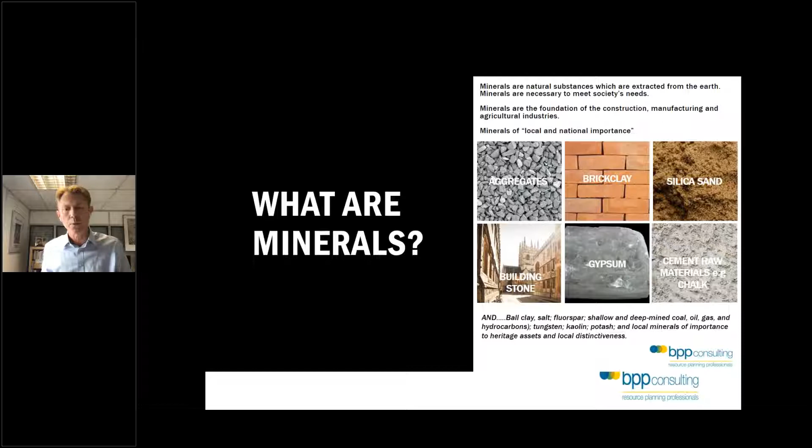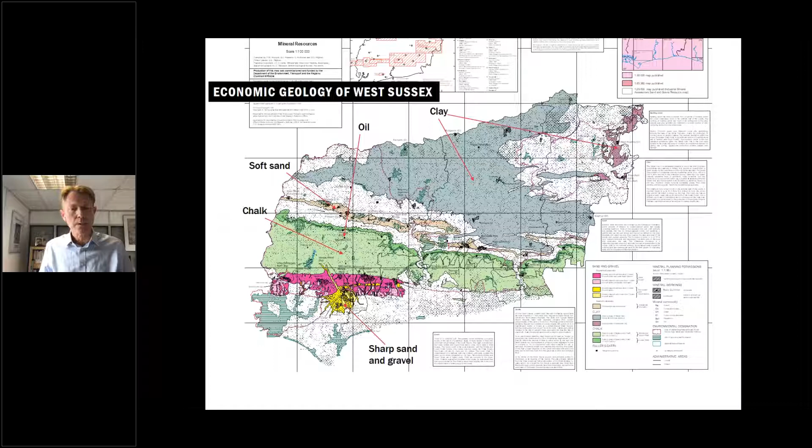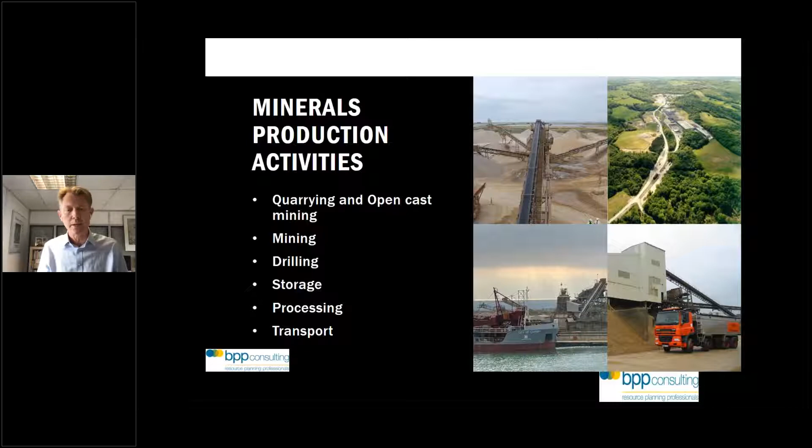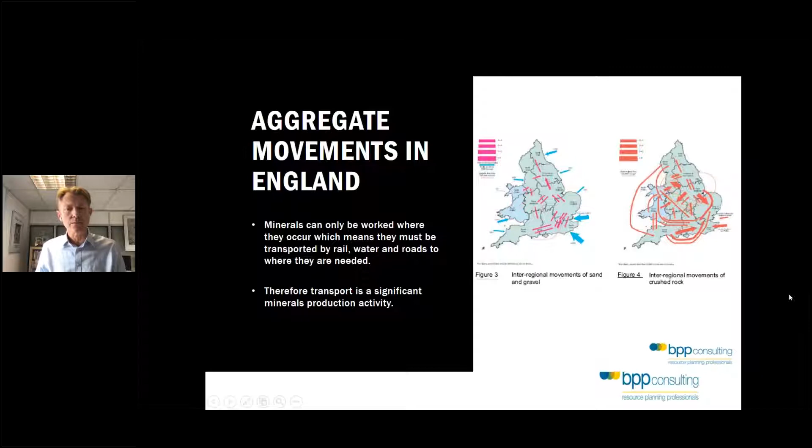Most of the minerals are not evenly distributed, and so have to be transported around the country to where they can be used. Next slide. And this slide briefly shows movements of minerals. I know David will talk a little bit more about this, but basically it's trying to illustrate the point that minerals transport is a particularly important activity. And utilisation of water and rail is an important aspect. It's a bulk material which does lend itself to rail and water transport. Next slide.

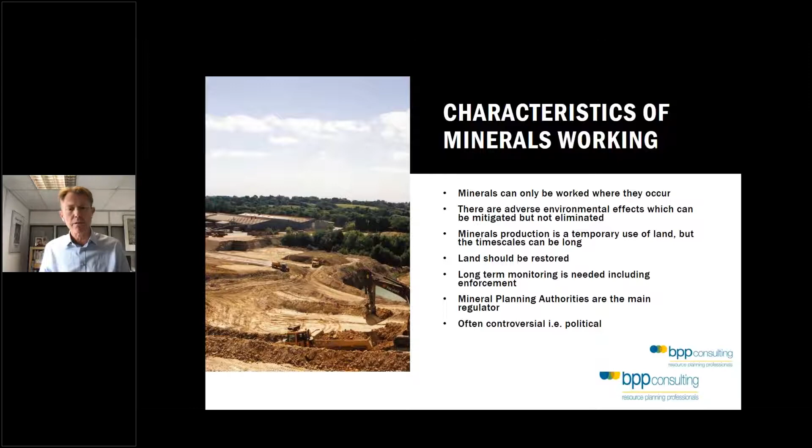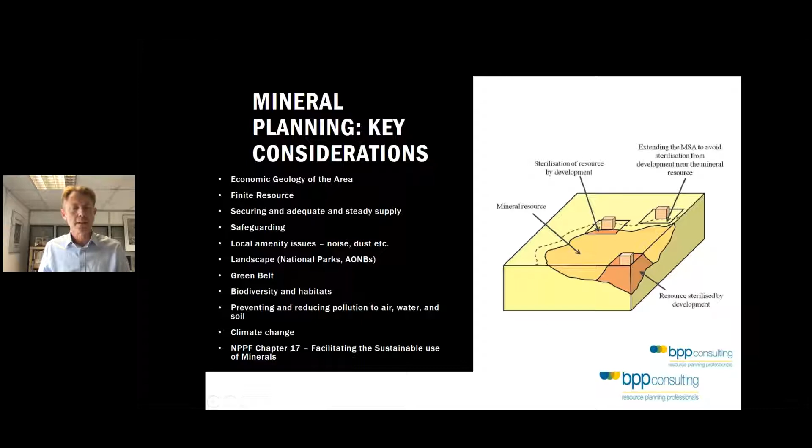Inevitably, there's local amenity issues to consider, such as noise and dust. Landscape is a key issue. It does seem that many of our most important minerals are located near to national parks, areas of outstanding natural beauty. Jeffrey's moving me on quickly, quite right too.

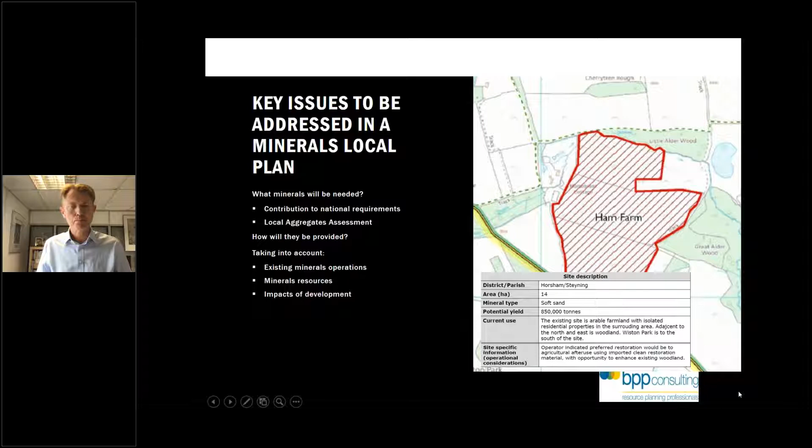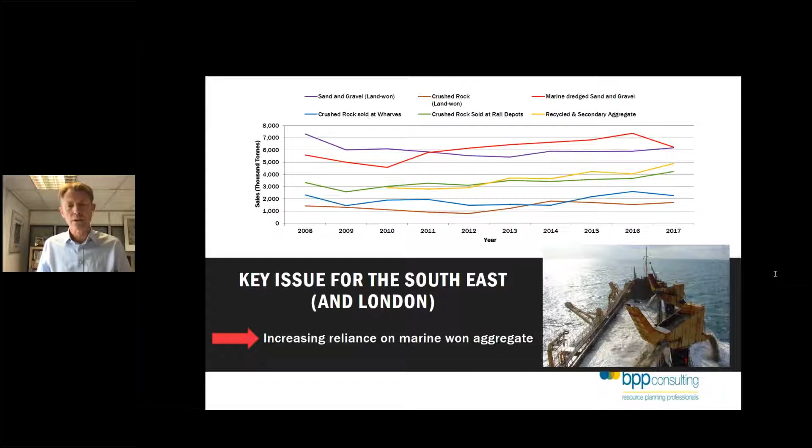Next slide. So that's it. Just a warm up really for David and Helen. Thank you.

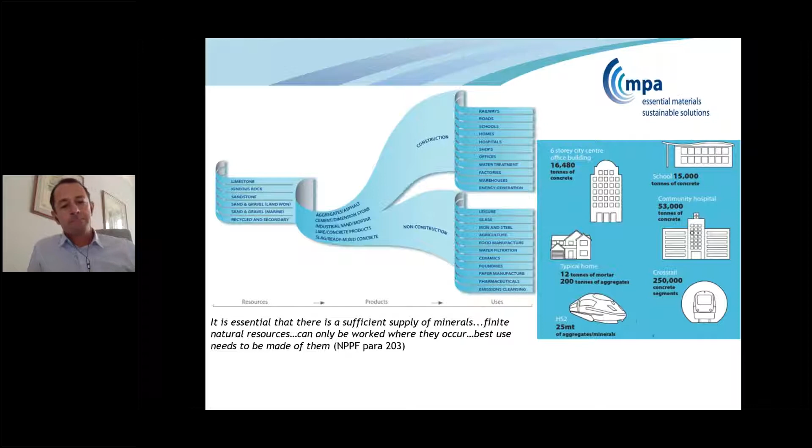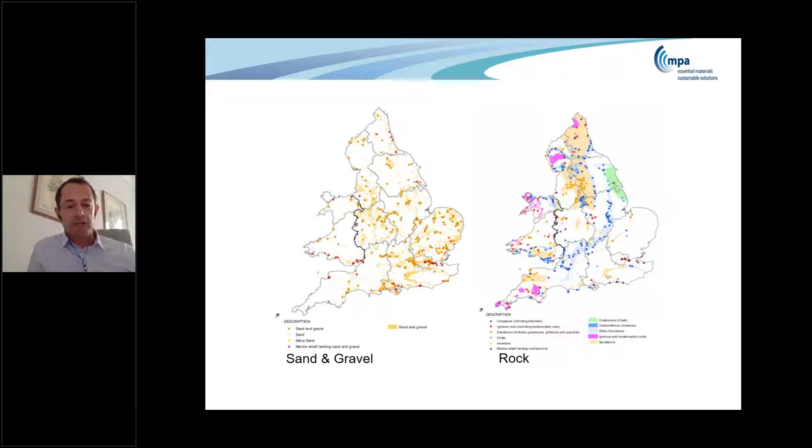So particularly from the South East and London perspective, a lot of rock is imported from the South West and also from the East Midlands, particularly Leicestershire, into the South East and London, which has very few rock resources, as you can see.

Next slide, please. So some examples of what it looks like. If you go back a sec, Jeffrey, just tab backwards. This is a soft sand site down in Hampshire, so it's used primarily for mortar, so for bricklaying. You can see that the characteristic is quite shallow. This is a very good natural resource which requires very little processing from the ground.

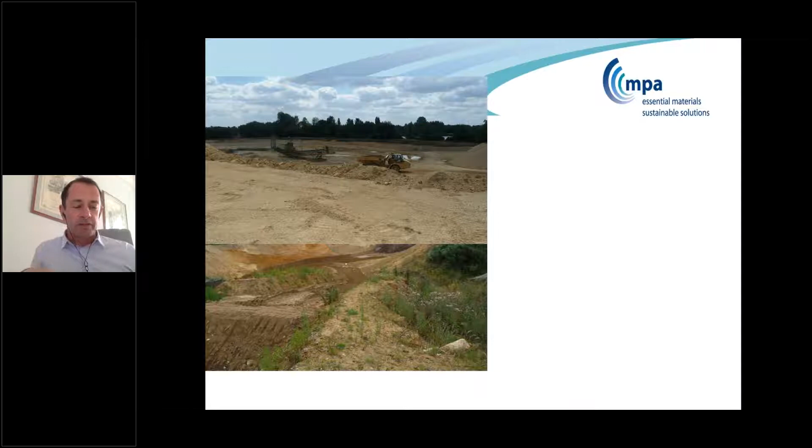Next slide, please. This is a typical sand and gravel quarry. This one's in Oxfordshire. Again, reasonably shallow. It's in a river valley. Very small amount of overburden, so the resource is just below the surface. This site in particular is going to be restored to a very large nature reserve, one of the largest reed beds in the country when it's restored in about 20 years' time.

This site is a rock site up in Shropshire. The stone here is very important for road stones. It's very skid resistant. There was the Bahrain Grand Prix yesterday, which had that crash, obviously. The rock that surfaces the Bahrain Grand Prix circuit is from this site in Shropshire, incredibly. Next slide, please, just to show that it's not only locally important, some of this material is globally important.

This is a limestone quarry with a cement works, so feeding the cement works. And next slide, please. And this is China clay works down in Cornwall, so quite extensive working to extract the China clay. I think what we can actually see in the foreground there is aggregate processing, which is a kind of secondary activity on top of the China clay. China clay, again, a globally important resource, goes into a lot of ceramics, a lot of paper around the world. Any toilet you've ever sat on, the China clay probably came from there.

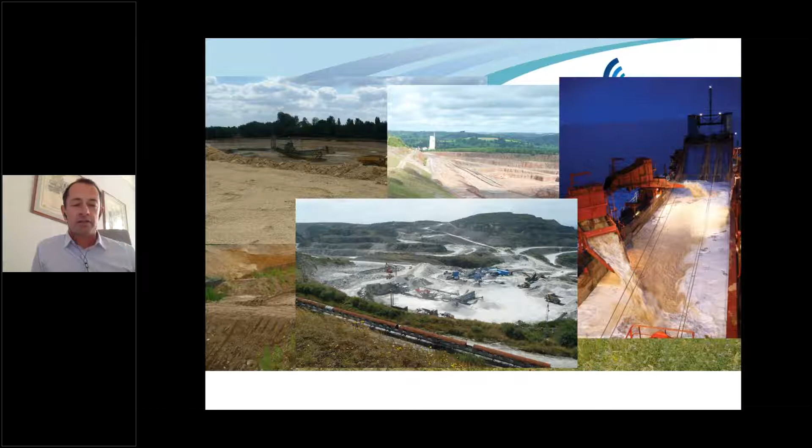And this is marine dredged, coming into a dredger, so it's hoovered off the seabed pretty much. And I'll say a bit more about that in a second. Just so you can visualize the impacts and the scale of some of these operations. Okay, focusing on aggregates and the managed aggregate supply system, I'll explain what this is, because this is the main flow of material. It's the main type of material that planning generally, particularly in the Southeast, has to consider. Next slide, please.

So I think Ian showed this slide. Reflecting the distribution, the managed aggregate supply system is supposed to secure a steady and adequate supply of material and address regional geographic imbalances between where the material exists and where it's required, so between the supply and the demand. This diagram just shows some of the main movements of material.

So on the left, you have crushed rock movements, which, given the limited distribution in the North, Midlands and the Southwest, a lot of it goes into the main markets in London and the Southeast. A lot of that by rail, so the long distance movements are by rail. There's a lot of infrastructure investment on the production sites with railheads. Material is then moved. A lot of it moves by lorry too, but a lot of it moves by rail into the areas of demand.

On the right, you've got sand and gravel movements, which, because it's more widely distributed, tend to be much smaller, around 30-mile movement maximum of material from a quarry, and much more local supply, because it's heavy, dense material, quite low value. It's not economic to transport it a long distance. Although those two blue arrows coming into the Thames and the South Coast show the major contribution of marine dredged to London and the Southeast too, which I'll talk about a bit more in a sec. Next slide, please.

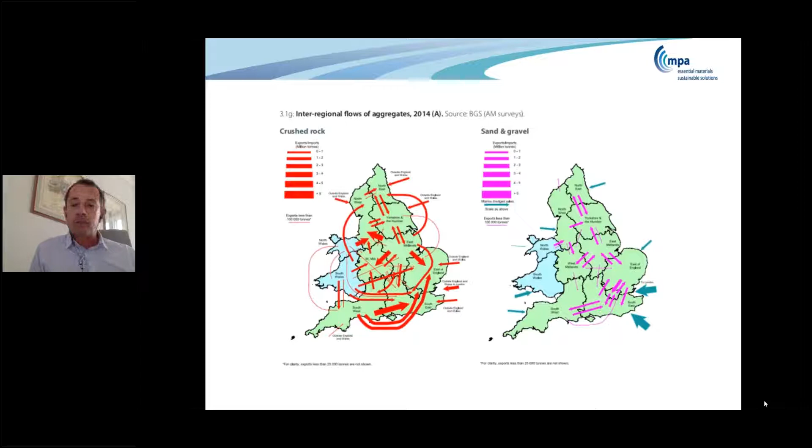So the managed aggregate supply system, prior to 2010 and localism, the abolition of regions, we had a kind of top-down system of national and regional guidelines which set out national forecasts of demand to enable a steady and adequate supply of material, under which you had regional apportionments, which then were distributed to the county councils or the upper-tier authorities to provide in their plans. Under localism, that's gone. The guidelines ran out this year. There's no national forecasting. It's all down to local aggregates assessments. So they are the fundamental component of aggregates planning at the moment.

They're based on the forecast of the average of 10 years sales. So they're quite backwards looking, particularly if you consider the graph I showed you earlier of the impact of the recession. So you look at an average of 10 years sales as the starting point for forward planning for the amount you may need over the next 15 years of a planned period. They're supposed to look at all supply options and also capacity of those sites to supply. And I think the important point here is land banks.

One of the fundamental principles of the managed aggregate supply system is that you maintain minimum land banks, as in permitted reserves of material which are permitted for extraction through the planning system. The minimum are a 7-year land bank for sand and gravel and 10 years for rock, which really reflects the time it takes from identifying sites, going through the planning process and then getting production from them. It can take a long time, so you need a land bank of material to enable steady and adequate supply. And also the balance between demand and supply. Next slide, please.

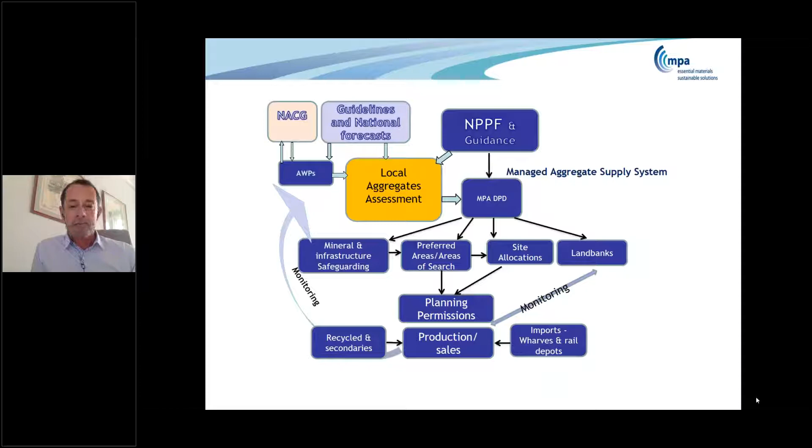Just a diagram here, it's a bit clumsy, but it just shows the central position in the managed aggregate supply system of local aggregates assessments. They inform what the plan provides for. That then goes through to identification of suitable sites, which includes site allocations and also preferred areas or areas of search and planning applications to come forward, maintenance of land banks, ultimately leading to planning permissions and production, then monitored back into the local aggregates assessment. Next slide, please.

So, given the movements of material around the country, the movements are from railheads into rail depots or from marine dredged into aggregates wharves. You need to safeguard the important infrastructure for transport, but you also need to safeguard the material in the ground, which is a long-term aim, long-term policy. It's not just about the amount of material you're going to need for the plan period. It's protecting finite resources for future generations. And the first one is about land-won minerals, identification of where those resources are in the ground, and avoiding unnecessary sterilisation through permitting development on top of them.

So a very important point for district councils, permitting and planning for housing and commercial development, to consider minerals in the ground, mineral safeguarding areas and mineral consultation areas as part of that planning process, which again, historically has been a bit of a problem, that it's not been considered in the local planning process because it's seen as mineral planning, but actually it's the local planning process which is critical to consider where the minerals are.

Next slide, please. Again, the MPA and the POS has produced guidance on the information requirements that are required, the consultation process, particularly between district councils and the county council as the planning authority in two-tier areas, to ensure that minerals safeguarding and safeguarding of infrastructure is taken into account at very early stages of site allocations, distribution of development and planning applications. An important point here, I think, is the concept of the agent of change, which is in the NPPF, which is about ensuring that existing businesses are not adversely affected by new development.

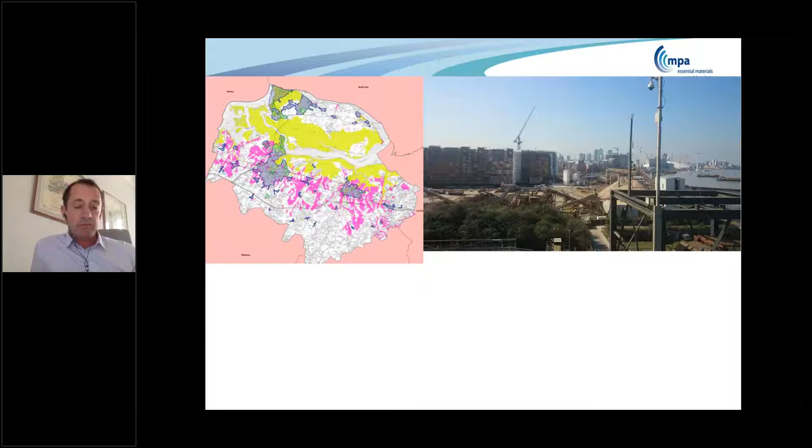And the next one. Thank you. So just to focus on London and the South East, in London, 97% of its primary aggregate supply, in terms of the amount of material that's consumed in London, the primary material that's consumed in London comes from outside London. So a lot of it comes by rail, as I say, from the East Midlands and from the Southwest into rail depots, and a lot comes into those wharves.

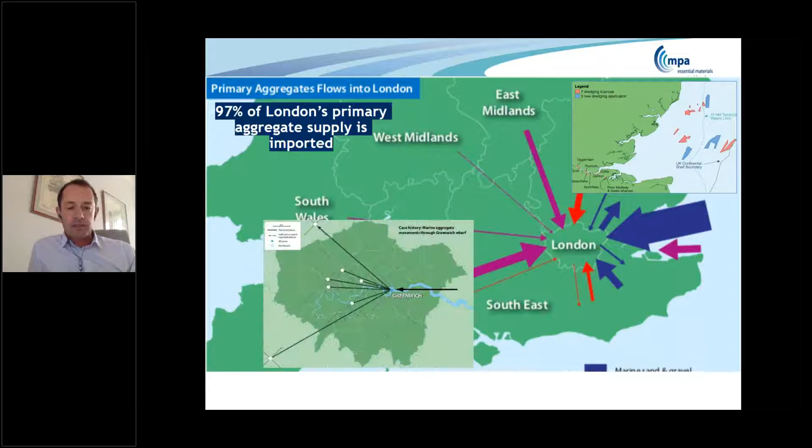Next slide. And these are the licensed areas off the Southeast and off the East of England. These are licensed areas where marine dredging occurs and it comes into those wharves in the Thames. And there's nearly 9 million tonnes a year comes into those wharves. When it comes into Greenwich, it then gets distributed by rail, a lot of it, but also by road.

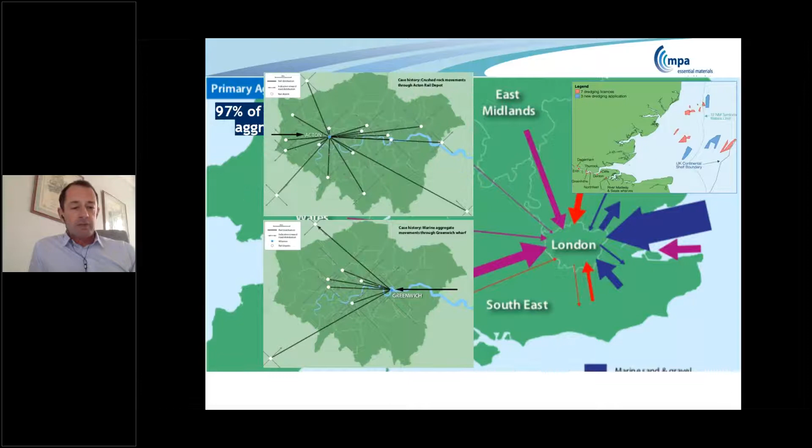Next slide. And into rail depots. So for example, Acton, it then gets distributed around the capital and also outside the capital by rail. So these are just the numbers in terms of which, again, in London, people aren't aware of this, the amount of material that is required to maintain the construction activity and the economy and where it comes from. Most of it comes in through rail depots, wharves, which is why safeguarding is so important. Next slide.

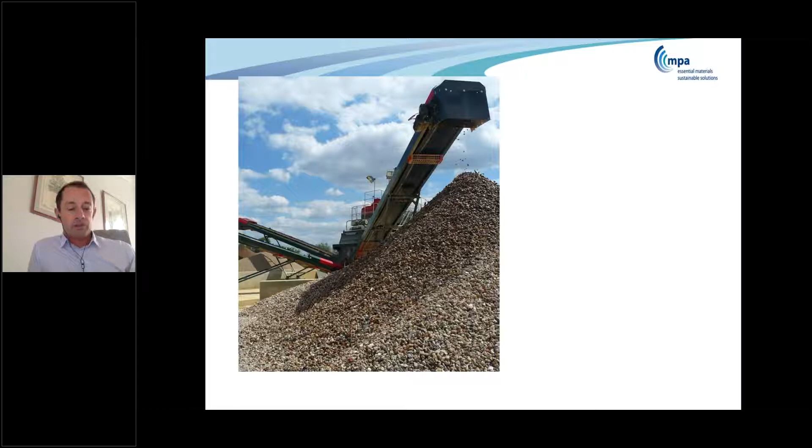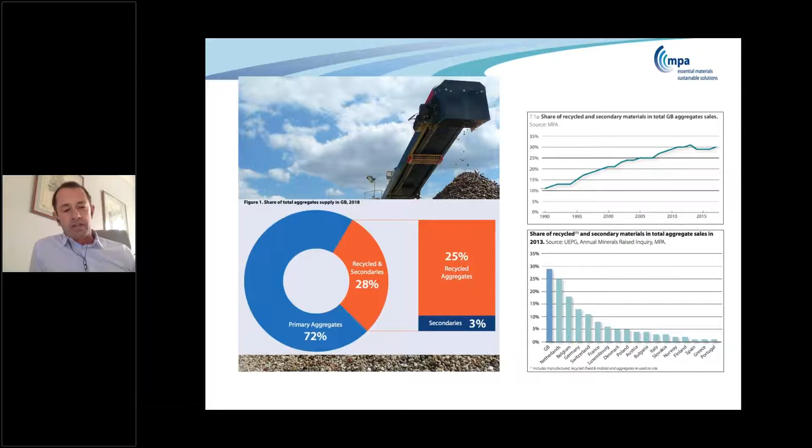And it's 30%. It's about the best in Europe in terms of percentage of overall supply. Of course, that supply depends on the construction material being there in the first place, which depends on construction activity. It also depends on that being the hard fraction of material which is able to be recycled, and also the quality of the processing plant and the kit to extract that material. The MPA has produced a couple of reports recently on this.

On the left, it shows the total waste stream. One of the largest waste streams in the economy is construction, demolition, and excavation waste. 120 million tons, that's the figure that was cited in the recent construction sector deal, which highlighted it was the biggest waste stream. But actually, when you look at where that material goes, the vast majority of it is used constructively, either through recovery, so for landscaping and filling of voids, or into recycling. And in fact, 90% of the hard fraction of construction waste already goes into recycling.

So again, it suggests that it's not an endless supply. We've probably reached the limits in terms of the amount of material, particularly the hard fraction, that can be turned back into recycled aggregate. It's not all suitable for all uses, particularly for structural concrete. You still need primary aggregates. So it's not an answer to replacing primary material. We're going to continue to need primary material.

But NPPF does say before you consider primary material, you've got to look at the practicability of supply from recycled material. So it's an important thing in terms of planning, but don't be under an illusion that you can replace primary production with recycled production. Next slide, please.

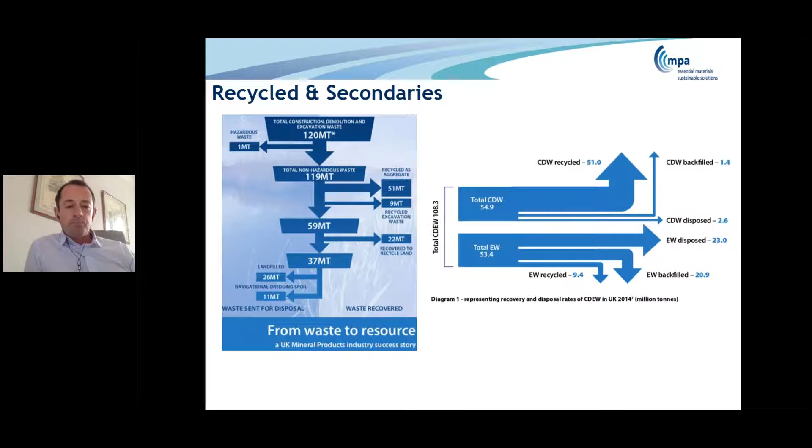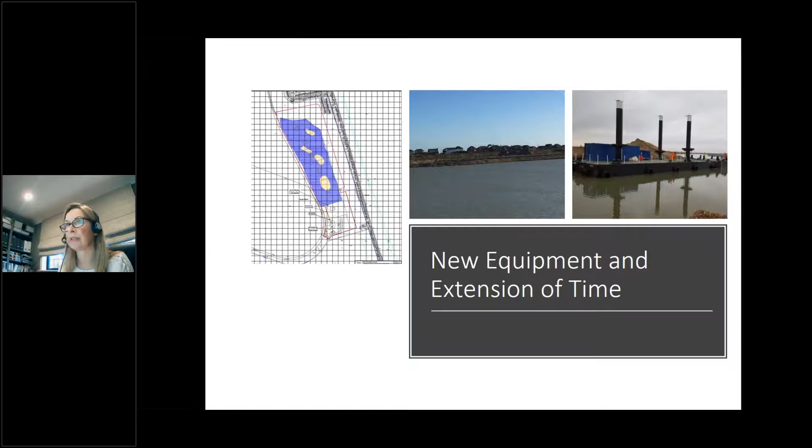And some applications involve the review and update of mineral planning permissions, in particular their conditions, that were granted after the 30th of June 1948. This was made a requirement by the 1995 Environment Act. These applications may need to be supported by EIA as well. Review applications should happen every 15 years, but this frequency has been relaxed now under the Growth and Infrastructure Act of 2013, which enables site operators to request a deferment where there's been no material change in the circumstances of the quarry. Next slide, please.

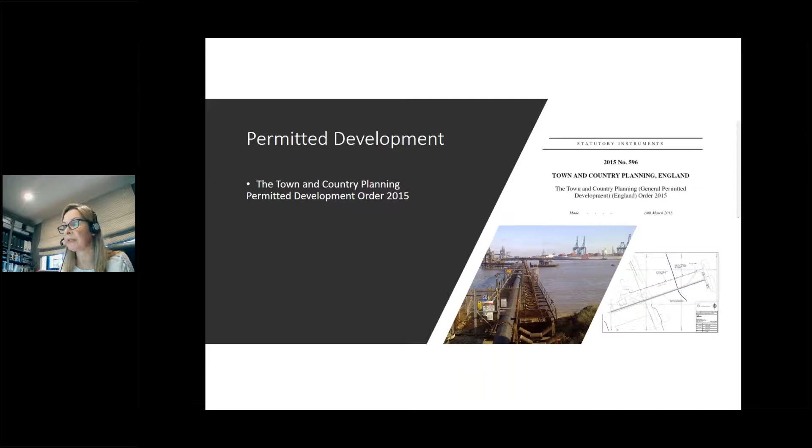Or development may be permitted development, so it's not a planning application for permission as such, but the council still may require you to prepare an application for a certificate of lawfulness of proposed use or development. Next slide, please. Oh, that's fine, sorry.

So now I'm going to quickly focus and run through preparing a planning application for a new mineral site. Before an application can even start to be prepared, there needs to be a lot of work that goes on in terms of trying to find a suitable site. As already said, minerals can only be worked where they're found. So companies will use existing borehole and geological data to pinpoint potential mineral sites, and for hydrocarbon sites, they'll use seismic surveys. Hydrocarbon sites have some flexibility over their location, but generally still need to be within a certain distance of the drilling trajectory, so they can get the drilling trajectory on target.

Once they think they have a potential mineral site, their mineral planner will then undertake a planning appraisal to see what the environmental and amenity constraints are and whether suitable access can be achieved. If this initial planning appraisal indicates that the site looks suitable, then further boreholes will need to be dug to test the quality and amount of deposit.

The mineral company will then need to assess whether the mineral resource is in a usable location. Is it close to existing markets, where there's demand? Will it be worth the investment in the land and the processing plant and the planning application? And even if they have the correct site in terms of impact and market, the operator will need to do a deal and get an agreement with the landowner and whoever has the rights to work the

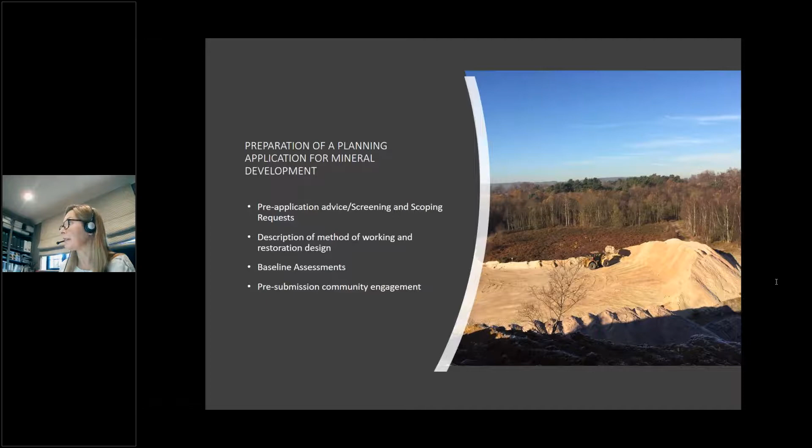In preparing an application, initially it's a good idea to take part in some sort of pre-application engagement with the local planning authority. This can either be through an EIA screening or scoping request, as minerals applications usually end up needing EIA. But as an applicant, the mineral company may also opt for pre-application advice from the local planning authority

or statutory consultees, especially if it includes a site visit or meeting, as this provides them with the opportunity to explain the method of working and propose mitigation measures. And it also gives them the opportunity to discover any local issues that they may not have identified in the site appraisal work. Next slide, please.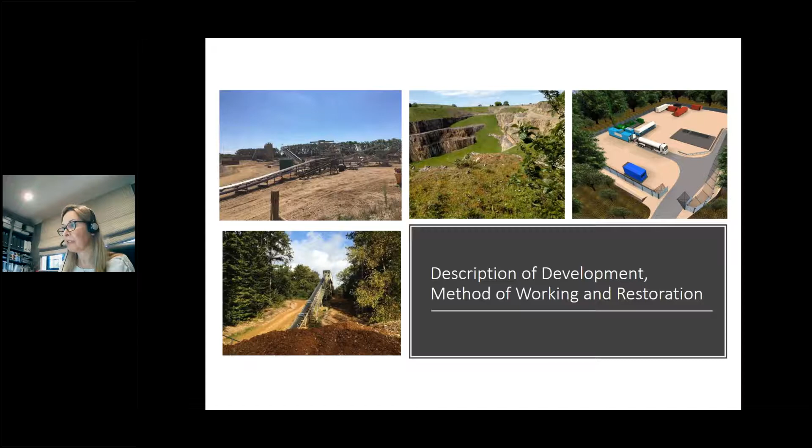So, how's the site going to be set out? What's the method of extracting the mineral? And what's the restoration of the site going to be like? These are all key considerations in designing your planning application. Next slide, please.

Aggregate minerals are usually worked in a series of phases, often with a processing plant and sometimes a concrete plant also on site. Working in phases means that the whole site is not an open quarry void, but rather mineral is extracted from one phase, and then whilst this first phase is being filled and restored, extraction work progresses onto the second phase.

How this phasing is arranged, where the extraction margin is planned, where the processing plant is erected, and where all of the stripped soils are stored, all needs to be planned and designed, and will depend on the characteristics of the mineral, the site, the environmental and community constraints.

And ultimately, you as a mineral planner need to secure planning permission for the operating company. So you have to be involved in the design of the site to make sure it meets the environmental and community policy guidance set out in the NPPF and those of the relevant development plan policies.

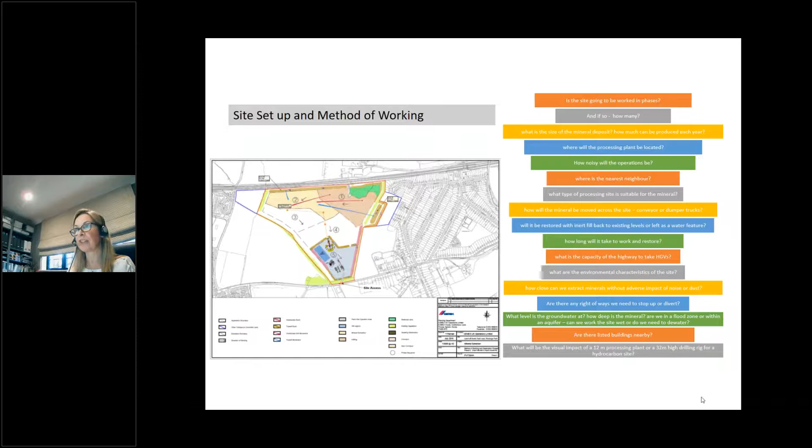And I've just put some questions on the screen, and these are just an example of many questions which need to be answered so that you can come up with a plausible site setup and extraction scheme. Next slide, please.

Restoration to nature conservation with net biodiversity gain means you may want to retain and enhance particular habitats and features already on site, and design the mineral extraction around them. And restoration to housing may mean working with the house builder on the design of the mineral scheme. Next slide, please.

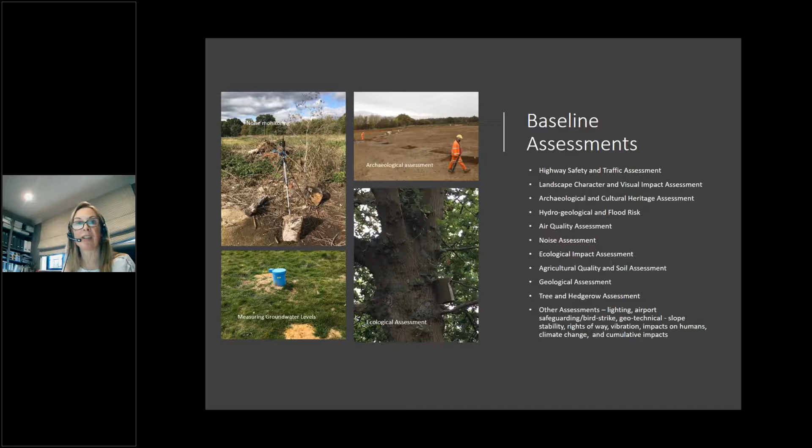So once you have a plan of how the quarry or hydrocarbon site will be worked and restored, various baseline assessments will need to be undertaken to understand what impact the proposal will have and what mitigation measures will be required to reduce them to acceptable levels. And this slide lists some of the possible assessments that may need to be undertaken in support of an application and included in the EIA. Next slide, please.

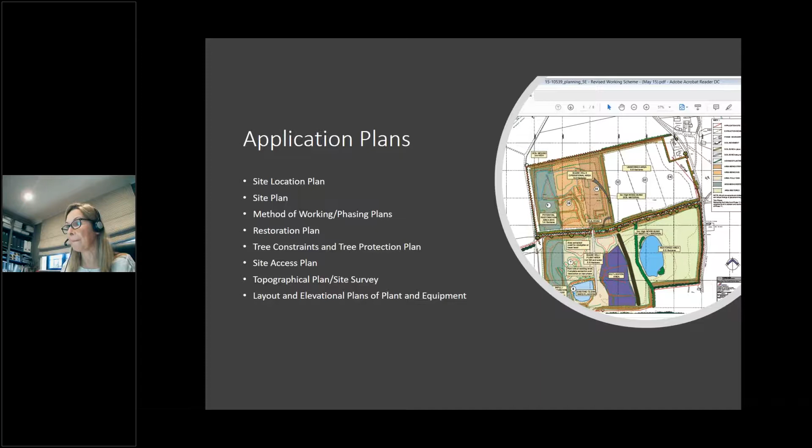And the planning statement submission should include a section on need for the mineral, which should set out the status of the land bank and whether annual mineral production requirements are being met in the area. The application will also need to focus on the restoration scheme and the benefits it will bring once restored. Once the application is validated, minerals is classified as a major development, so there'll be a 13-week period of determination, or 16 weeks or more if it's EIA. A minerals application then follows the more normal regulation and procedure of how a planning application is assessed.

So this has been a bit of a whirlwind, but as you can see, I've tried to outline to you today there's a huge amount of work that goes into preparing a minerals planning application before it arrives on your desk. It can take years to find a site, to get it allocated and prepare the application. And I haven't been able to cover all of the items or unfortunately go into any examples today. But I hope you got a flavour of what it's like to prepare a mineral application. And it can be really an interesting process.

And you're really the project manager working with a team of consultants and the Minerals Planning Authority to deliver the minerals to the market, which we all need and use. So I think as the others have mentioned, I encourage you to get involved in minerals planning during your career, and you may be surprised how challenging but enjoyable it is. Thank you.